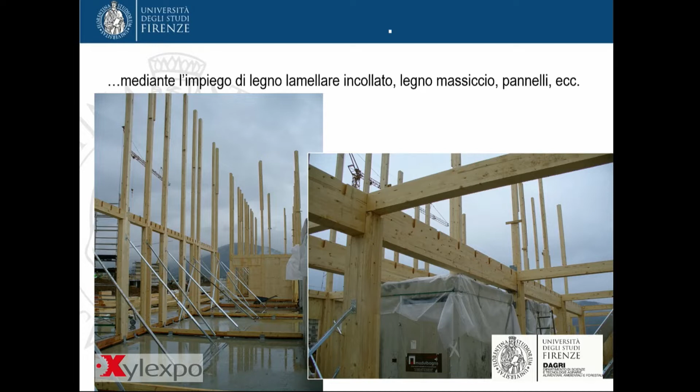The assembly of the timber elements, and this assembly is then completed with metal elements such as screws and tie rods. Then we have the timber frame buildings, which we often see depicted in American movies.

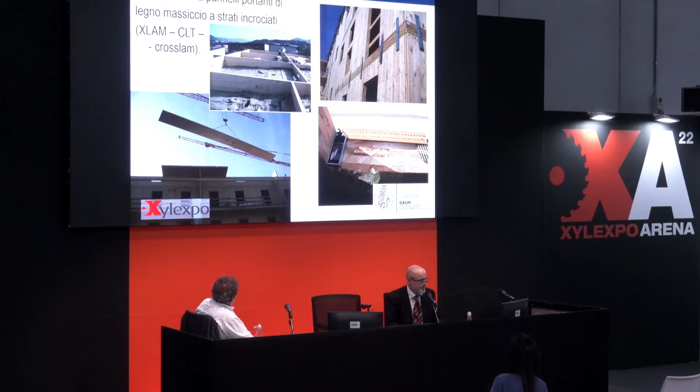Of a building. This is a post-earthquake building in L'Aquila, and there is a lot of technology behind this type of work. So

You can see pressing of the panels. They lend themselves very well to rapid assembly, fast assembly, and prefabricated buildings.

Solid wood cross-lam timber buildings are growing in numbers, and they are very important because they contribute to CO2 sequestration, which is fixated by trees, and it stays in wood until that building is demolished.

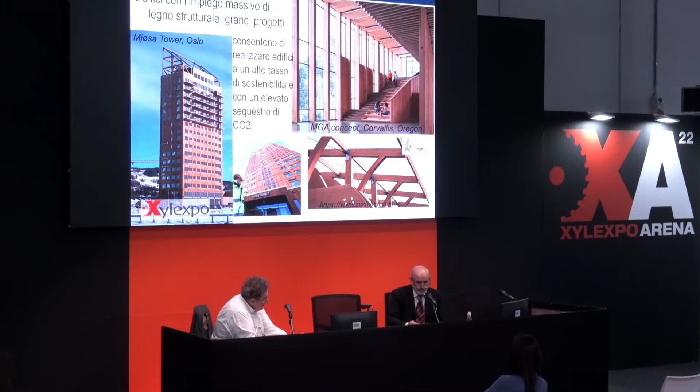And it is also important because it allows a better sustainability, especially if compared to concrete, steel, and so on and so forth. So we may discuss whether it is more or less impactful, more or less sustainable, a timber-based material versus another. But if you compare wood or timber-based elements with other construction materials, for sure timber has a higher degree of sustainability, and this is certainly a very important incentive for whoever needs to make a choice in terms of which material to use for structural use.

I may now be a little bit boring, but I'd like to hint at the technical construction rules. The latest edition in 2018 has somehow changed the approach by planners and designers to wood. The introduction of these rules allowed timber to be on the same footing as the other construction materials.

Before the publication of these rules, we had to come up with somehow different arrangements. We had to make reference to international rules or to established habits and practices. But then in 2018, the technical construction rules were released, and from that very moment, wood has acquired the same dignity as the other construction materials, and of course this also implies equal obligations as other construction materials.

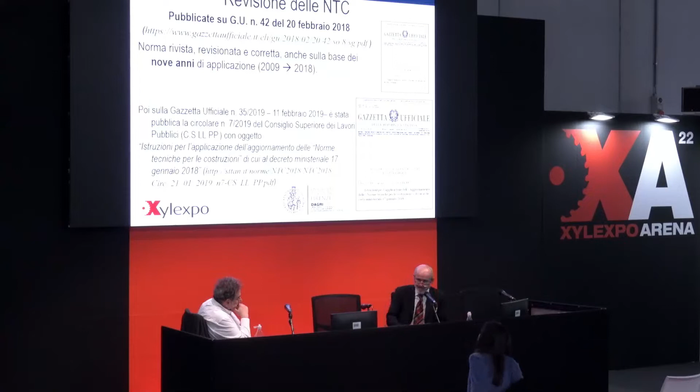released in 2008 became effective some years later, and it was then updated in 2018 when it was revised and updated. And in 2019, the guidelines on understanding the technical construction rules were also developed.

So I will not go through every single piece of the construction rules. The focus on timber is in Articles 4.4, 7.7 and 11.7.

And our focus will be specifically on 11.7, materials and wood-based products. This is the chapter that we are going to pay attention to, the 11.7, because this chapter defines the requirements

of the materials' properties, procedures to qualify materials, and this means that all the rules and regulations for construction materials are set and mandatory to be complied with, including wood, including timber.

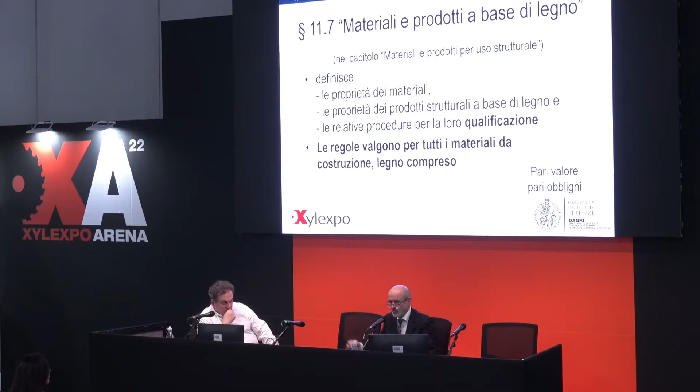And this is important because in the past everybody went their own way. There were no rules, there were no regulations, for quality materials. Everybody—different materials were qualifying as quality materials. So it's important to have this set of rules that allow us to build safely.

Chapter 11 of the technical construction rules also identifies the important professional profiles for the building process: the producer, the manufacturer, the planner, the builder, the construction site manager, site inspector, and so on and so forth. Each professional profile has its own functions described in the technical rules.

Also in terms of choosing the correct quality of the materials, be it solid wood or glued laminated wood. And of course these requirements must be verified, assessed and accepted by the construction site director. So timber and timber-based products therefore are required to go through the entire legal requirements as any other construction material.

Any product based on timber or products derived from timber, be it panels, trusses, or beams, must be uniquely identified by the manufacturer according to specific procedures. They need to be qualified by the manufacturer, meaning the manufacturer must indicate the grade and quality of the material, and its structural properties like resistance or supporting capability. These data must be specified in the building project.

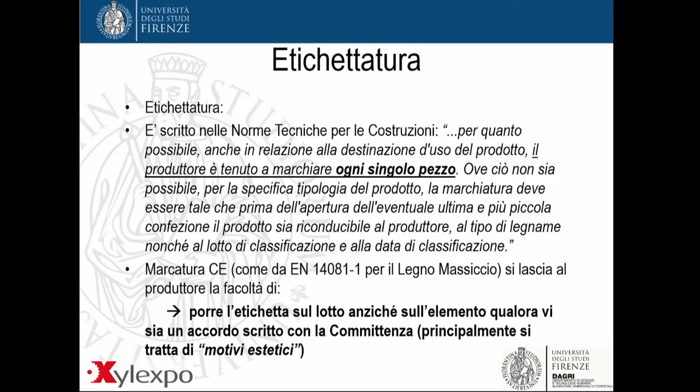Now labeling - unfortunately in Italy, in spite of the fact that technical rules provide for wood to be labeled, there are possibilities of not labeling wood elements, but instead accompanying them with a document summarizing the characteristics of the wood provided. What is an exception in Italy has actually become the rule, because oftentimes, for financial reasons, you prefer to enclose the document rather than marking and printing the individual product item. They say you spoil the beauty of the beam, but the marking is usually placed somewhere you don't actually see it. We should get used to the fact that marking is important for us, because we sleep on it.

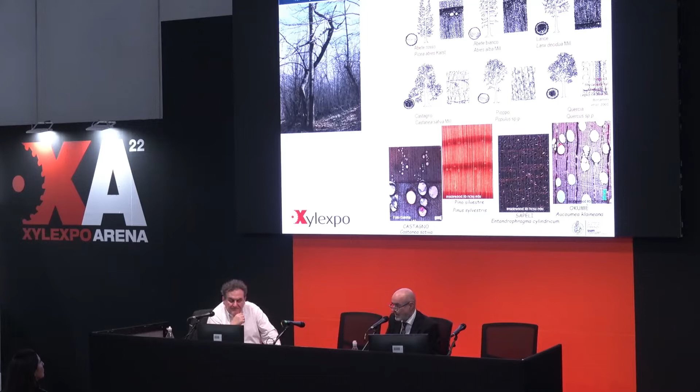This is a big difference, especially in relation to the fact that our material is growing as nature lets it grow. As you see on the left-hand side, it's two chestnut trunks that are presumably two children of the same strain - one is perfectly straight, whereas the other one is anything but straight, so it cannot be worked. We're dealing with natural raw material, grown according to the laws of nature - the environment, the weather, fire, windy areas, worms, fertile soil. This implies an enormous variability in characteristics, and if you multiply it by the great variety of wood species available, you have extreme variability of raw materials.

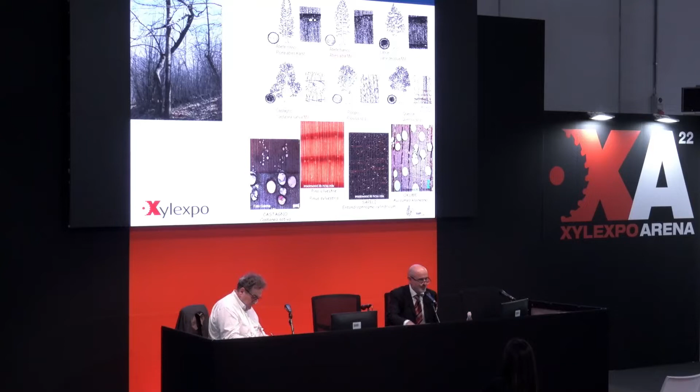If you talk about steel, I decide how much iron or carbon I want to put in it. If it's concrete, I decide the amount of sand or whatever, but it's different.

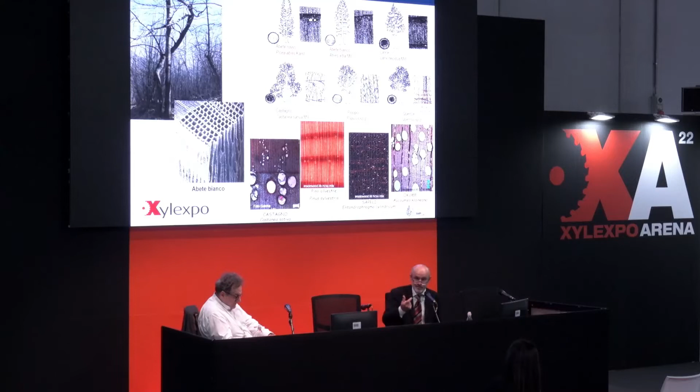Unfortunately, we used to have materials that are made—I mean, this is for concrete again. We used to have concrete and iron and say this is good, this is no good, this works well, this is broken, this is less concrete, more concrete.

Whereas nowadays we have a different situation where our structural material is made of wooden elements, and in a rack like this you won't find two pieces of sawn timber that look exactly like another, because of the rings, how it was sawed, the defects, the knots. So then a house designer will tell you, well, I can't do this.

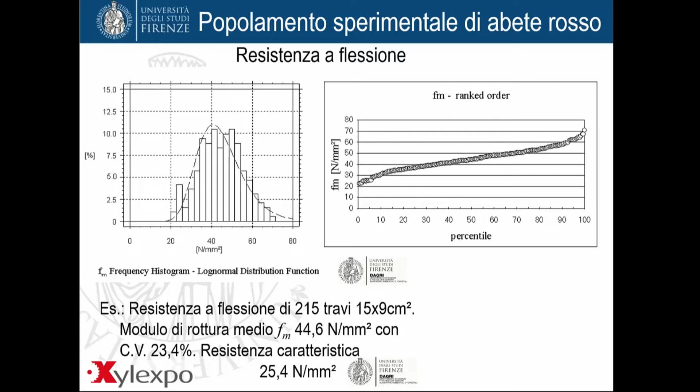How can I use different pieces? How can I be assured that two different beams hold the same? I'll tell you how. In order to solve this problem of natural variability of wood, Europe has defined a principle that allows us to reduce this natural variability and make it contingent.

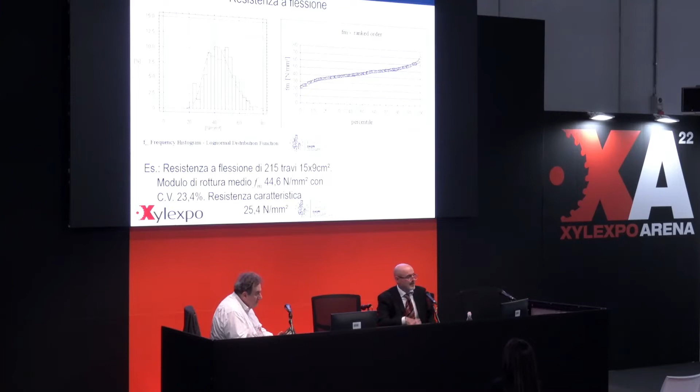So to really reduce it significantly, reducing exactly the possibility of having different values for our material. You see here two charts, real beams, spruce from Val di Fiemme in northern Italy, 215 beams, and you have the values here.

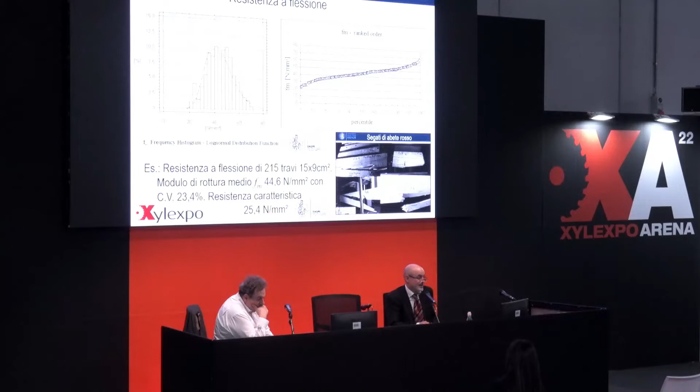So our goal is to reduce this variability, to select timber in a homogeneous group. It was, again, 215 beams, and each piece of timber broke in its own peculiar way.

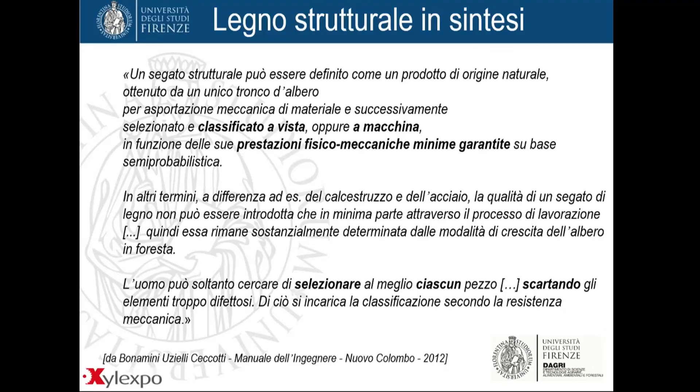And if we transform sawn timber, any kind of sawn timber, into a structural product, we have to go through selection. We cannot produce solid wood ourselves—it's made by nature, we can only saw it from the tree. Once it's sawn, we can select it on the basis of its strength characteristics, and these strength properties are the ones that affect the resistance and strength of the beam once it's in place.

Again, visual—that's where we talk about visual or machine grading. We get the sawn timber, it is classified. Each piece is graded, and some pieces are actually discarded.

This is a totally new way of working. In the past, they would sell you timber in bulk, whereas now manufacturers have to grade sawn timber one piece at a time and discard the ones that don't comply with minimum requirements.

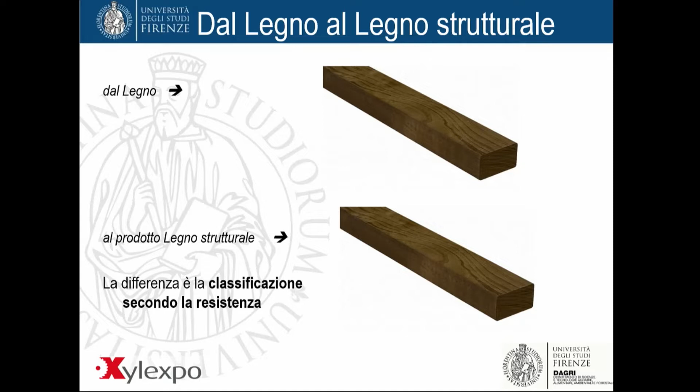Now, solid wood—switching from sawn timber to structural wood, nothing changes in terms of the product. The one above is any type of timber. The one below has been selected to be structural wood. This applies also to laminated wood, and it applies to cross-laminated timber. So each board has to be graded, otherwise it's not structural timber or wood.

So this was the introduction. Now I'm going to briefly summarize, give you an idea of how the principle works. So we're going to talk about visual strength grading.

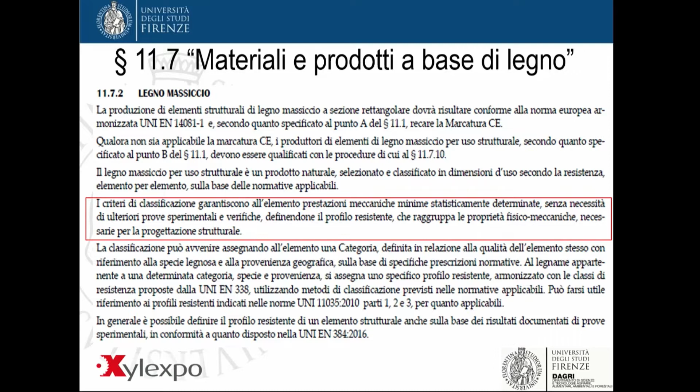Here too, many designers were a bit skeptical about this, telling me, you give me parameters, recommendations, but who actually knows wood? And knows wood since it was a tree, and so knows the characteristics, properties, defects of a tree that actually become the properties of wood—especially the ones that impact its strength.

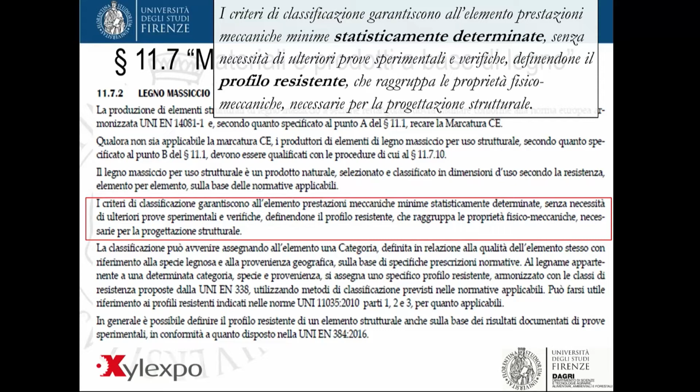The rules say that grading criteria ensure minimal mechanical performances that are statistically determined. So we basically establish characteristics that are statistically determined so that we know the risk of using one value or another, one grade or another, without the need for additional testing.

We define the resistance profile, or strength profile, the set of mechanical properties of that wood. If I get C24 class grade wood, I know its tendency toward stiffness, strength, flexibility, bending—all of the typical characteristics that structural wood must have.

And a category, so a grade, is assigned to wood that defines its quality, but it's not quality that we decide subjectively. It's certified quality with reference to the wood species and with reference to the geographic location. And what does geographical location have to do with this? It's just spruce, but I can tell you that spruce growing on the Alps, looking onto the Po Valley, at low altitude versus high altitude, is different.

Spruce growing in Germany does have different characteristics than spruce growing in Italy, so geographic location does have an impact. Wood belonging to a specific category is assigned a specific resistance profile, and the designer, the architect, defines the strength properties of wood that he wants to have. So if the designer specifies C30, I must give him wood that is C30 graded.

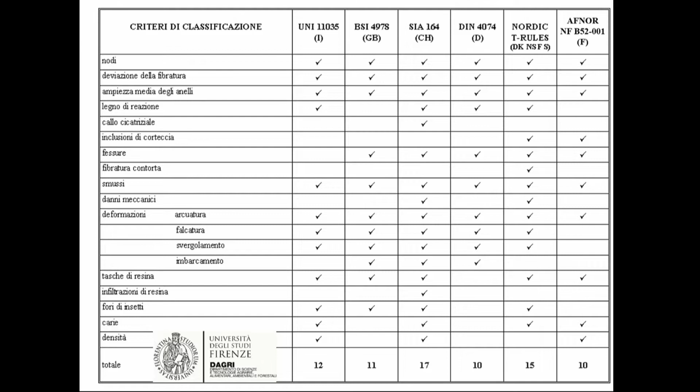This is an example of different visual strength grading systems: Italian, Swiss, German, Scandinavian, each with a number of established criteria. Some criteria are law requirements under European regulations, the harmonized regulation by the EU that establishes the minimum requirements to ensure wood strength.

The measuring of knots is done differently in the UK than elsewhere. There's the knot area ratio, and in Germany we have the minimum knot diameter. Everybody has got their own criteria, but the minimum criteria are assured and guaranteed by the European standard. There are countries that have been grading for 100 years, and we Europeans could not go to them and say now you're going to use the EU regulations. So everybody actually developed their own national rules.

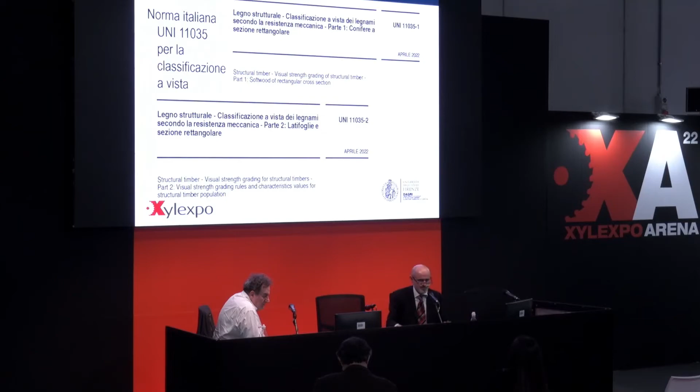In Italy we have UNI 11035, which was released with updates just recently. It covers visual strength grading of timber, part 1 for softwood and part 2 for hardwood. This is a very compact release, so we have everything in one single standard.

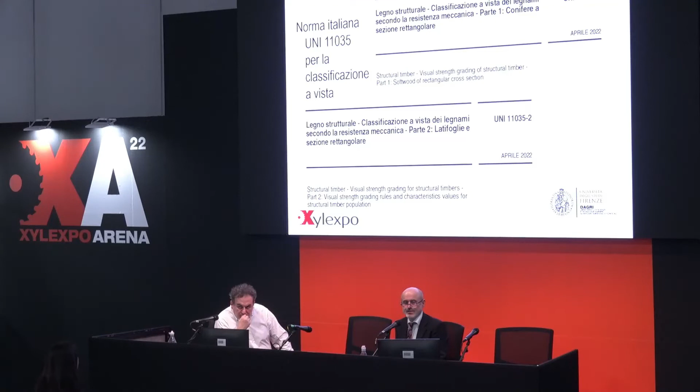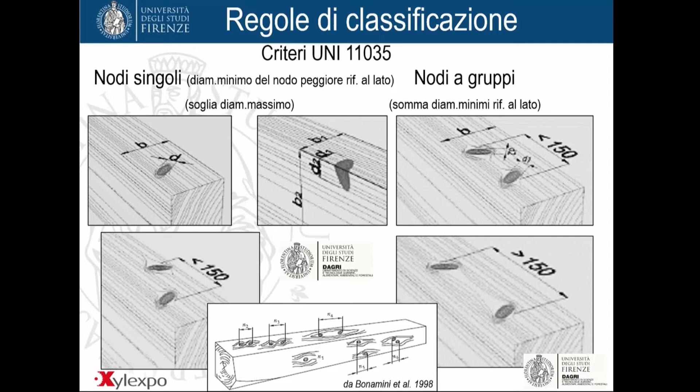Just a few examples, we won't go into all the details. The Italian UNI standard is somehow aligned to the German standard. It's not really like Germany, but in the 80s and 90s a number of tests were made on Italian wood, comparing different national laws. We didn't have the EU regulation yet, so we compared the rules from Germany, Scandinavia, Switzerland, and the UK, and the German standardization system was the one that allowed us to obtain the best result with the least effort. So the Italian standard was similar to the German one, and here you have individual knots and clusters of knots, which are assessed and measured if they are of a certain size to make sure they comply with the standard.

An expert grader doesn't need to know if a knot is 25 or 27 millimeters. He just needs to know if it is below 20 or between 30 and 40. So you don't go there with a ruler to actually measure, it's just visual. You measure only where you have concerns, for instance, if a knot is around 0.4 or 0.6, to know whether it belongs to one class grade or another.

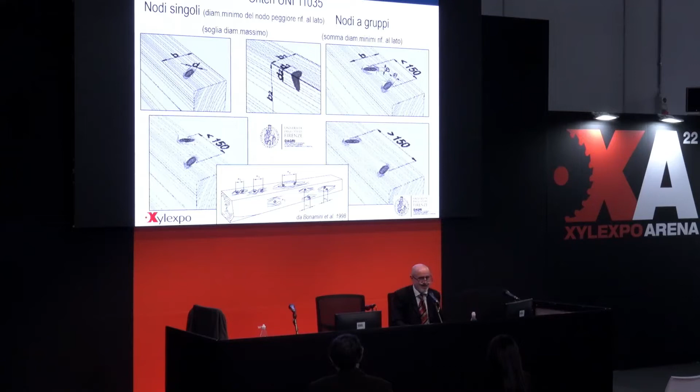Because knots don't have a value in themselves, but they do have a value in reference to the zone of timber where they are located. So if I have a 2 centimeter knot on a 30 by 30 beam, it is one thing, whereas a 2 centimeter knot on a different sized beam is another. So knots are the first criterion considered when doing visual strength grading.

Then there are additional parameters, like the slope of the grain, those vertical tubes. If you're lucky, they're quite straight; otherwise they're a bit sloped on the edge of the timber zone. The width of the rings also has to be measured, especially for certain species, because if wood grows slower, it's thicker, like a pine grown in Sweden compared to a pine grown in central Italy. So the width of the rings is an important parameter, and it does have an impact on the density of wood.

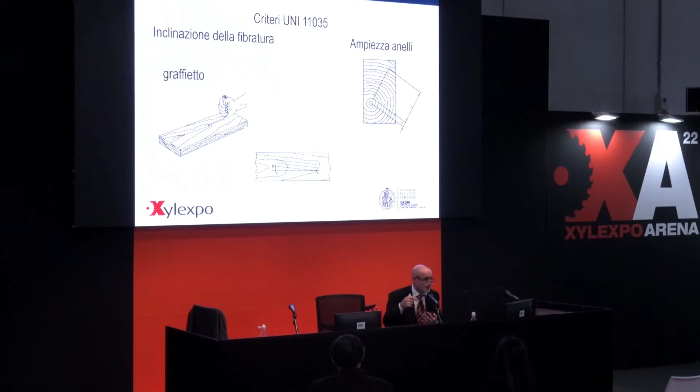Density of wood is important in mechanical connections, screws, pins, bolts and nuts, everything that is metal, since metal is much more rigid than wood and interacts with it. So we need to measure density to know how it will resist.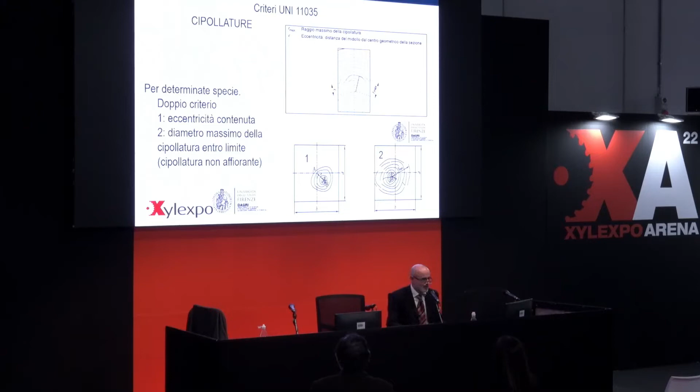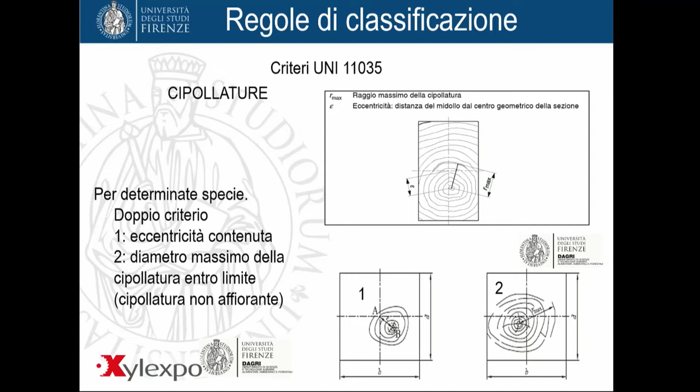Then there are some defects to consider, because chestnut, for instance, is a typical Italian wood which does have a typical defect called ring shake. But in our standard we do allow for ring shake, because we do love chestnut in this country.

Visual grading with the Italian standard 11035 applies to seven species grown in Italy: softwood species are fir, spruce, Douglas fir and larch, and hardwood species are chestnut and beech. Beech is new, as it was introduced in the release of April 2022.

So these are the wood species grown in Italy that can be graded and marketed for structural use in the construction industry.

So how is the grading standard? This is for fir, spruce, Corsican pine and larch. There are characteristics having an impact on strength: knots, rings, grain, fissures.

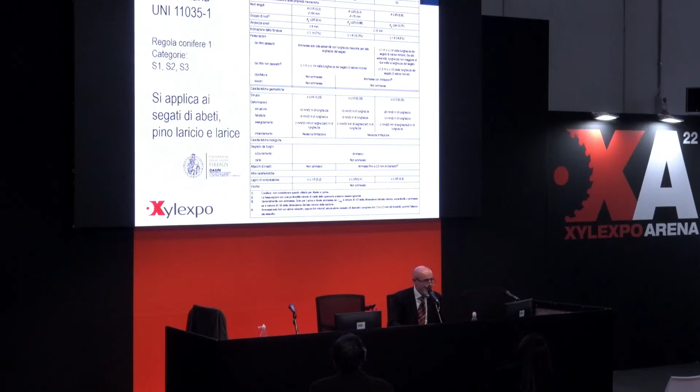So in Italy, fir S1 is class C30. Designers use grading class C30, 300 kilograms per square centimeter. And it's not the average value, this is the minimum value.

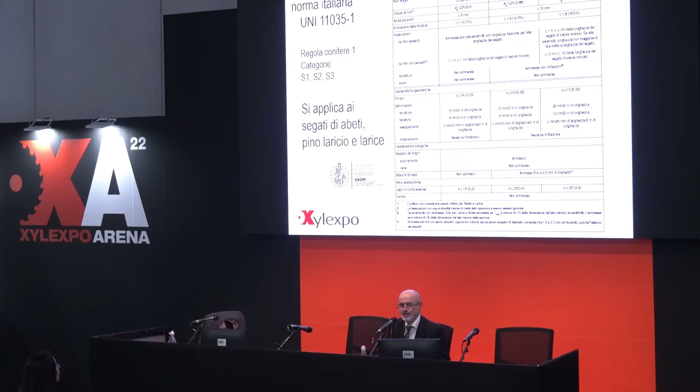S2 is C24, 240 kilograms per square centimeter. S3 is grade C18, so 180 kilograms per square centimeter. So designers can choose among these three grade strength classes.

And then we have softwood 2, we have Douglas fir, which is an American wood, Northern American wood, that is actually grown in our mountains too. It does have beautiful strength properties, and it maintains high performance, high density.

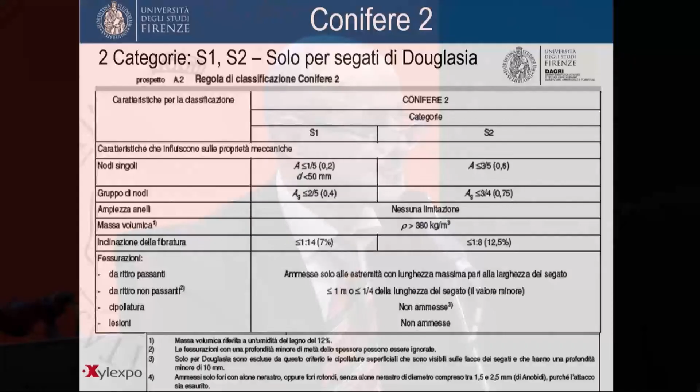So we dedicated a standard specifically to Douglas fir, with S1 and S2 grades. Now we move on to hardwood.

The standard is changing, and shortly there's going to be the European standard EN 1912 that associates categories to strength classes, species to strength classes.

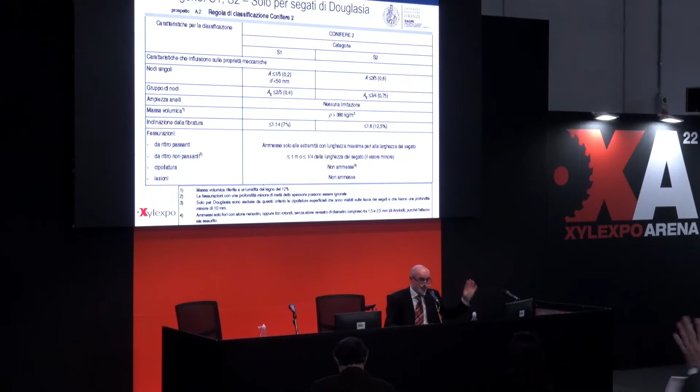So the next standard, 1912, we'll have two possibilities with Douglas fir. If I grade it into S1 and S2, I will have C30 and C22 respectively. If I put them all together, so just S2 and better, it's all C24.

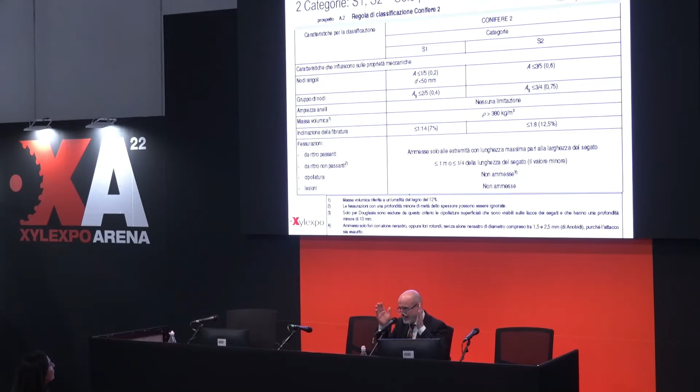So it depends on how the manufacturing plant is set up. If they want to have C24, it's just S2. If they want to do more, they can differentiate, but they cannot have C24.

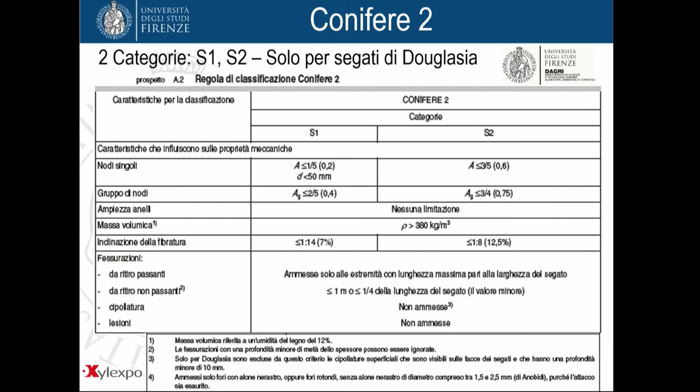The procedure by which we assign value to structural wood properties is different. So if I establish threshold values for S2, I'm able to obtain better gradings, so I end up in C24.

But if I do have S2 and S1, part of the better material doesn't help contribute to S2. If I split into two categories, S2 is C22 and S1 goes into C30 - that's 220 kilograms per square centimeter.

That's C22. The characteristic value is the minimum strength value, threshold. Then we may have sawn timber that supports much more than that value, but that's the minimum requirement for the planner. So if you take Douglas fir, it not only bears 220 kilograms per square centimeter, even more.

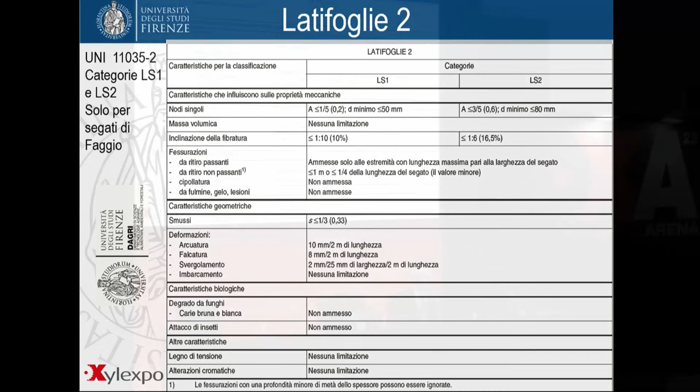Let's finish with chestnut, which only has one category, one class, LS. It ends up in D24, 240 kilograms per square centimeter, and then we have the new rules for beech timber.

Beech timber doesn't have a market yet. It has only two categories, LS1 and LS2. We are ready for future developments - we will have other timber species, other wood species, and we will try to implement the number of species to be used for structural use.

So LS1 and LS2 is what we have now available for beech. I can't remember them well by heart, but I think LS2 is 30 and LS1 is 35. Beech wood is much more resistant, stronger, but it's also more dense.

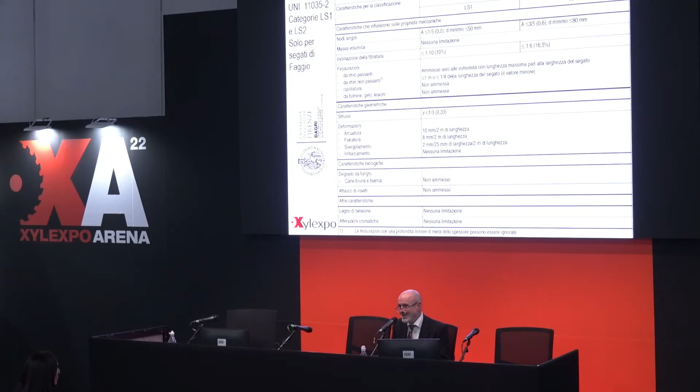So the density of chestnut is 580, spruce 420. The more wood you put, so more walls and less empty spaces, it bears more weight. But again, I don't remember all these classes by heart - I need to double check these values.

There is a question from the audience which we cannot translate because we didn't hear it.

Oak timber is not yet available in Italy. There is no visual strength grading rule in Italy, so whoever buys oak wood buys it from the international market, not in Italy.

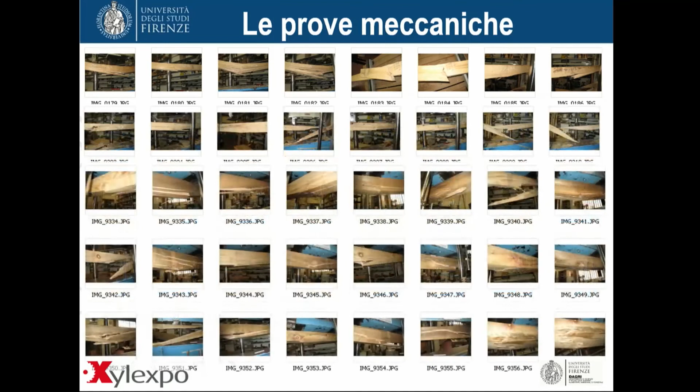In order to give you an idea, in order to determine values, we need to break some thousands of samples because we need to work on large numbers. The value thresholds need to be determined statistically.

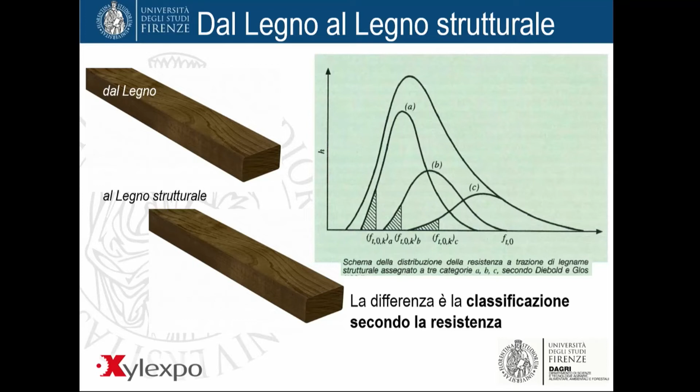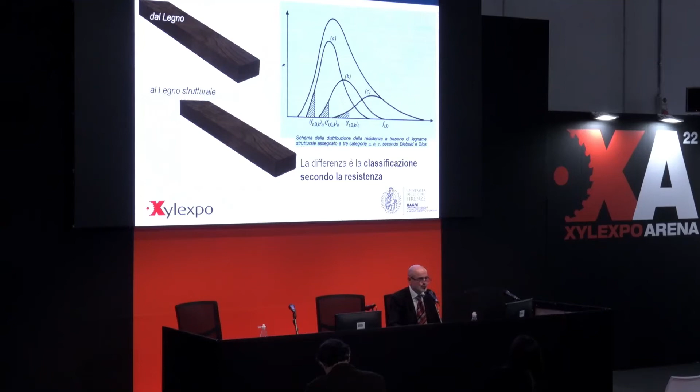So going from timber to structural timber, the difference is the grading and the fact that we need to discard some materials. In the graph, the big curve has no piece in the lower part - that's the material that was discarded, that could not be classified as structural use. This is something we need to bear in mind.

So there is a certain percentage of material that must be discarded. I only have 9 minutes left, and I will focus the rest of my report on machine strength grading, which is the innovation, and it is the reason why I'm here.

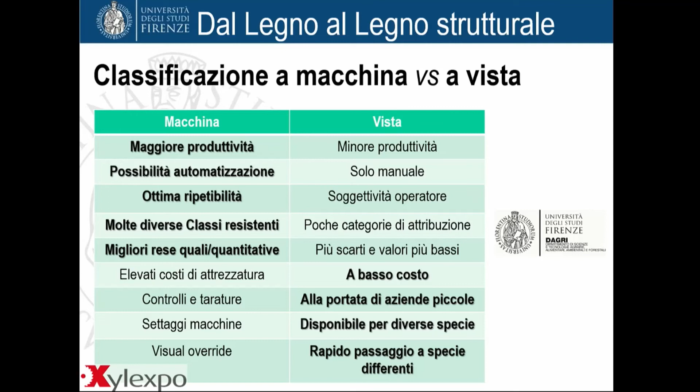The bold character indicates advantages, benefits - more productivity, hundreds of pieces per minute can be graded. There is a possibility for automation, and excellent repeatability. Two grading processes on the same sawn timber piece allow me to end up with the same strength class, several diverse strength classes, and also better yields from a quality and quantitative point of view.

On the other hand, visual strength grading costs much less. It is within the reach of small companies, and in Italy we are faced with a market characterized by small and medium enterprises which cannot afford a 300,000 euro machine.

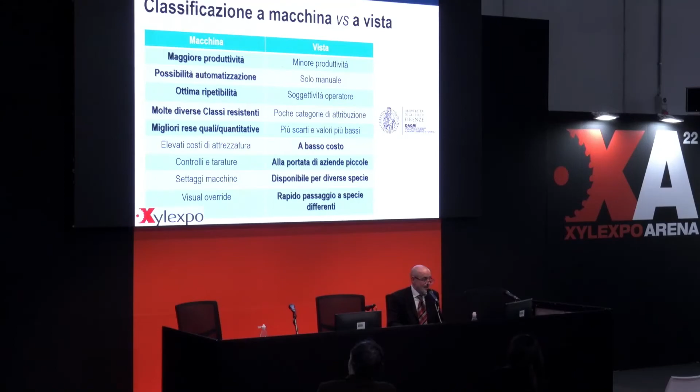It is available for different wood species, and it's easy to switch from one wood species to another - so now we have a fir, and that's now switched to birch. It's more versatile. But on the other hand, there are some cons: it produces much less in terms of quantity, and it's operator dependent, so the grader grades in a better or worse way - less predictability.

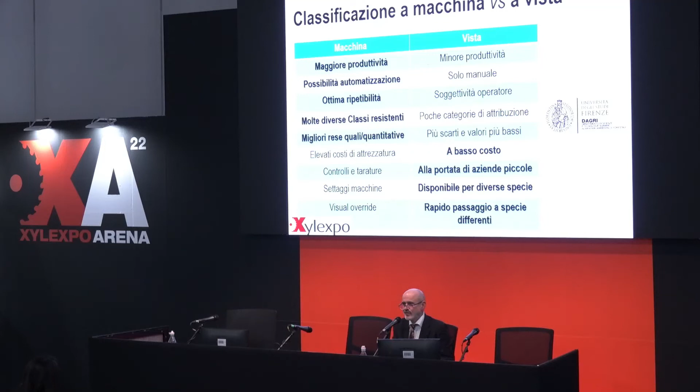For categories, for classes, chestnut has only one category, all the rest needs to be discarded. We tried to establish two classes, but values did not allow us for two classes - the values were too similar. The lowest class and the highest class were pretty much similar, so it made no sense to distinguish these hardwood species into two classes.

We only have one. So what are the grounding principles for machine strength grading? It's based on non-destructive methods - basically a selection of parameters are measured. These parameters are related to stiffness and resistance. These machines measure different parameters, they're put together, and based on a statistical collection of data, we then grade the various sawn timber.

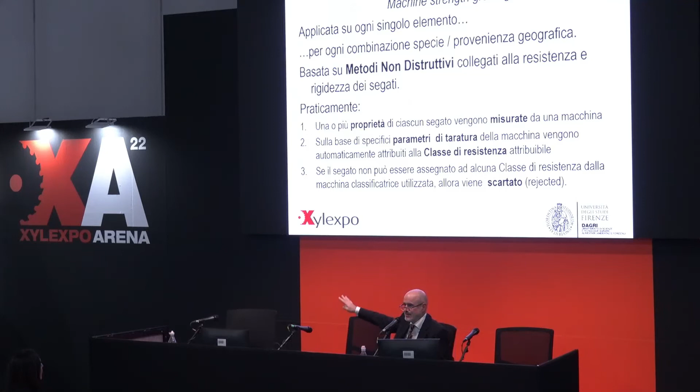If they're not good, there will be a pile of discarded timber, which will be sent to carpentry for other uses. But it must be a separated, segregated pile of wood, not to be used for structural purposes.

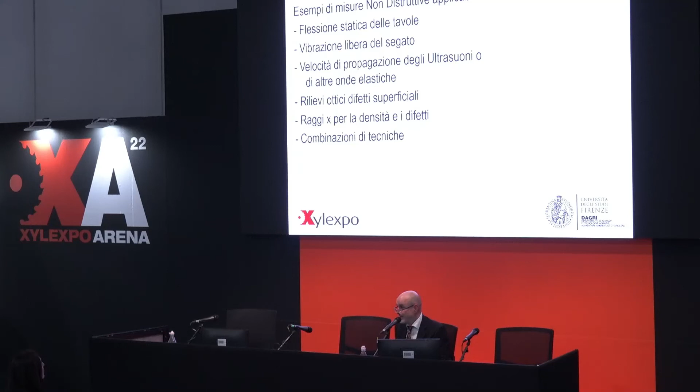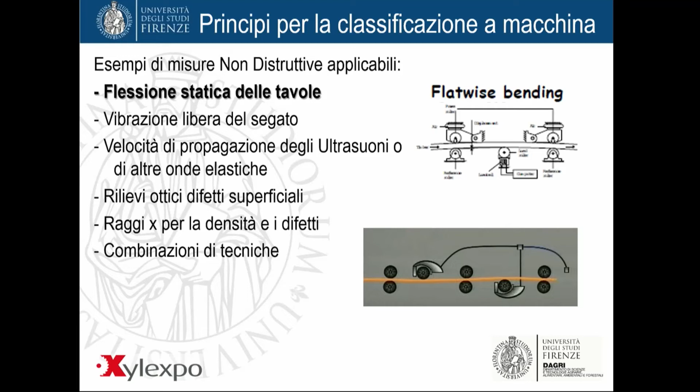Let's now look at some of the principles that we use for wood board grading. There is a system that we took from the Nordic countries, and it started from the bending principle - we take a wood board, we bend it on the flat surface, and we see how stiff it is. The stiffer, the more resistant to cut it is.

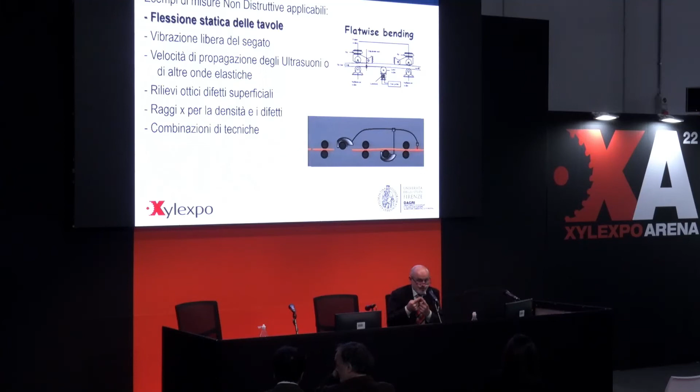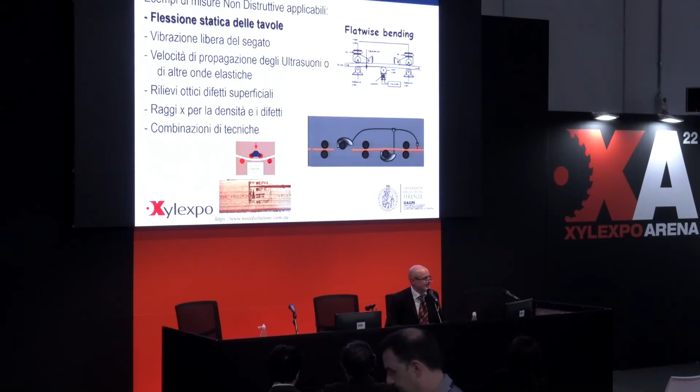The board goes into this machine where it is flatwise bent, and based on the point where it is most bent, that's how I would grade and classify my board. And I will print the abbreviation, the acronym of the class there.

This is one system. Nowadays, there are new methods that are much more versatile, faster - dynamic systems. These dynamic systems are based on the free vibration of the sawn timber.

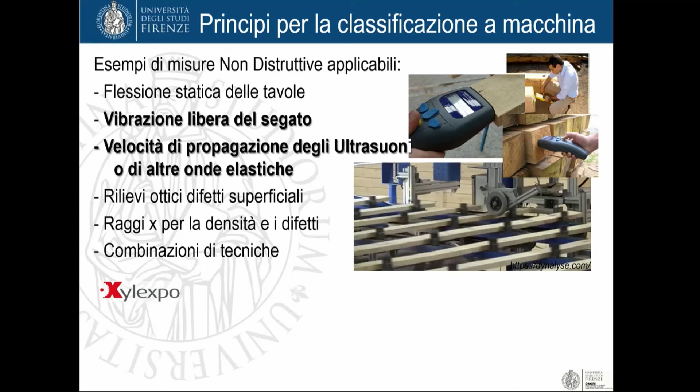You can see this small machine, MTG timber grade - we have it in our university department. You can use it on small lots of production, from 120 boards per minute, so one board every half a second. It's faster, suitable for production lines.

There are also some other manual grading systems, ultrasound based, some other devices used in laboratories, and pressure waves. The principle is you need to get a board to vibrate, and based on the density and the frequency of vibration, which basically means sound, the board will be more or less stiff than another. Based on the stiffness, you can then establish the connection to strength or resistance.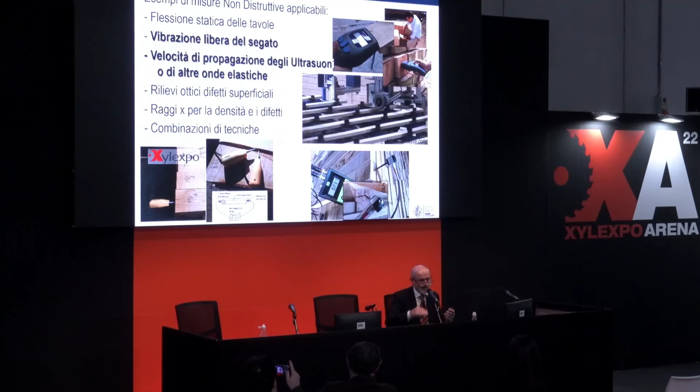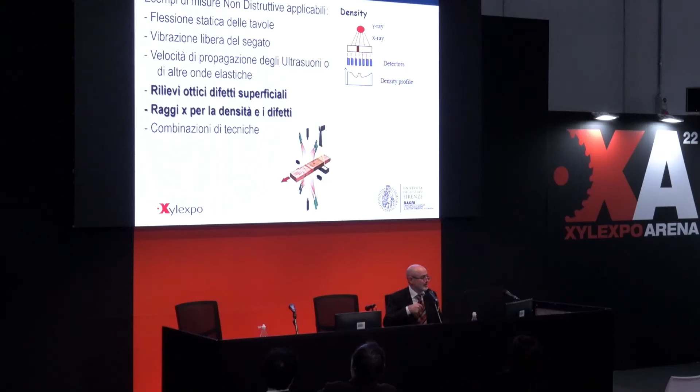And based on the sound, you can grade it into a class. There are also much more performing methodologies, combining X-rays, optical inspections. X-rays, a very, very complicated methodology.

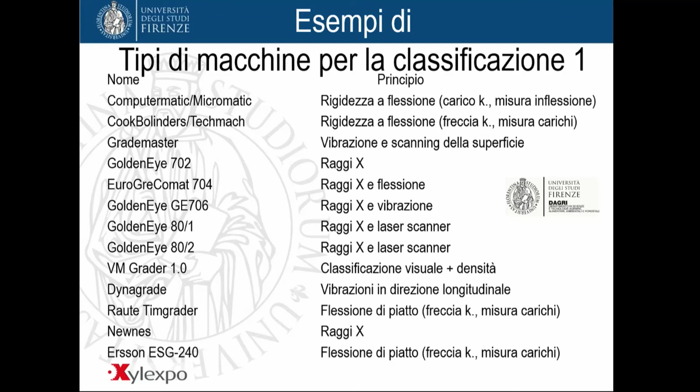We also are lucky enough to have a Microtec in Italy, a company in the province of Bolzano, northeast Italy, that sells worldwide, and it has very accurate, reliable, dependable, and valuable classifications. Here are some of the grading machines - this is a list of strength grading machines: CookBolinders, Techmach, Grademaster, Golden Eye, EuroGreComat, Golden Eye, VM Grader, Dynagrade, Raute Timgrader.

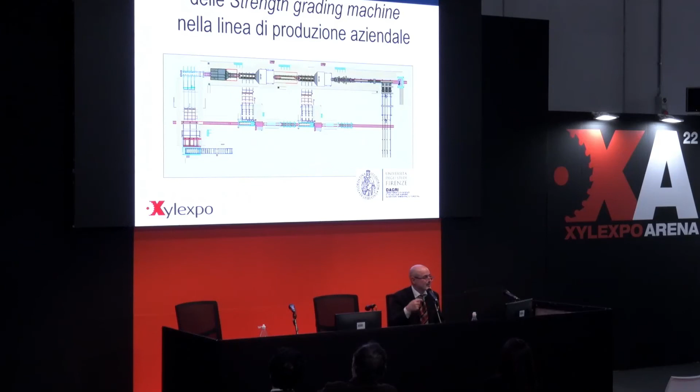There are many machines, but on the Italian market this type of process has not taken root already. So many companies haven't digested yet the process. But it would be very logical to have a production line of sawn timber and have a grading machine attached to it and sell my sawn timber for structural use.

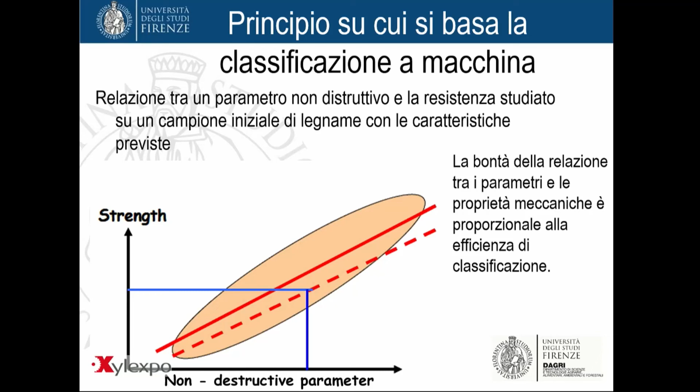This is the principle: I will take the non-destructive parameter on the horizontal axis, and correlate it to the strength of the material. Based on how good this relationship is, I can then establish the threshold value which drives the grading of the sawn timber. If all the values are close to the median line, my correlation will be very good.

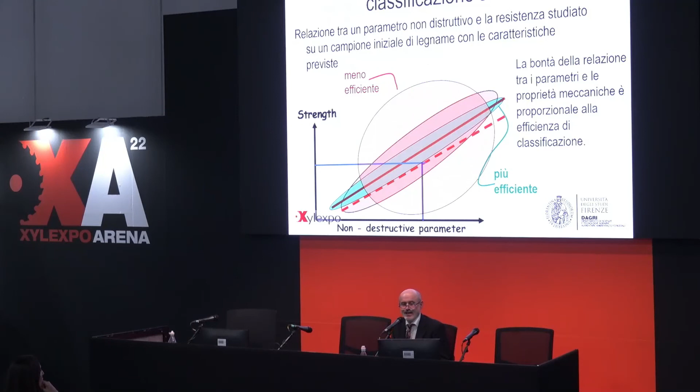So I will calibrate the machine below that value, so that my sawn timber is graded for structural use. If the distribution of values is less efficient and takes the shape of a cloud, like in this case, then my machine's parameters will have to be calibrated to a lower extent in order to be sure. First thing is safety - this is the basic principle.

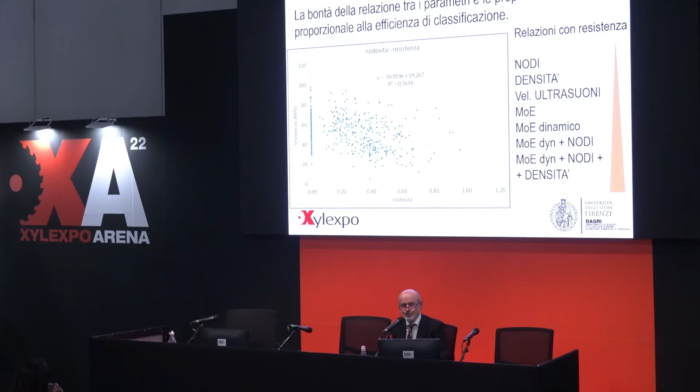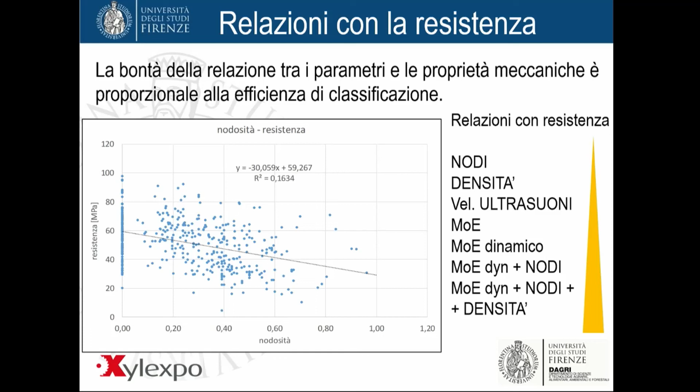I will not comment on all the data. Here what you see is knots, either measured with machines or by visual grading. The relation with the strength can also be obtained by a combination of parameters: a dynamic value with the number of knots, or density with the number of knots.

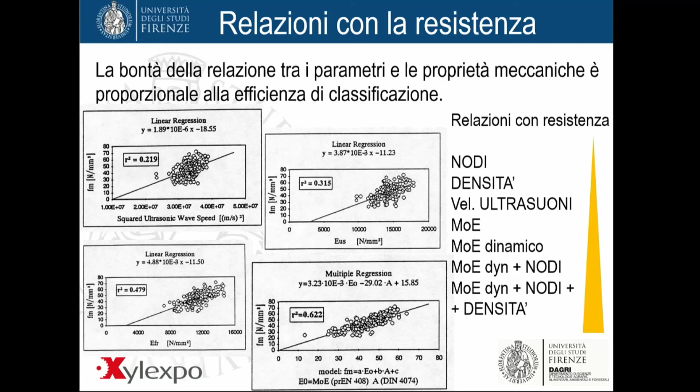By doing so, you can improve your grading results. So the more scattered or closer the clouds are, well, that depends on how you combine different thresholds. These are values attached to the sawn timber that I broke myself in that Trento Carpenter's workshop. At the bottom on the right, you can see more compressed values - we combined more parameters, knots, vibration, and density, and this improves greatly the ability of the machine to grade properly, and therefore the possibility to obtain fairly good strength classes.

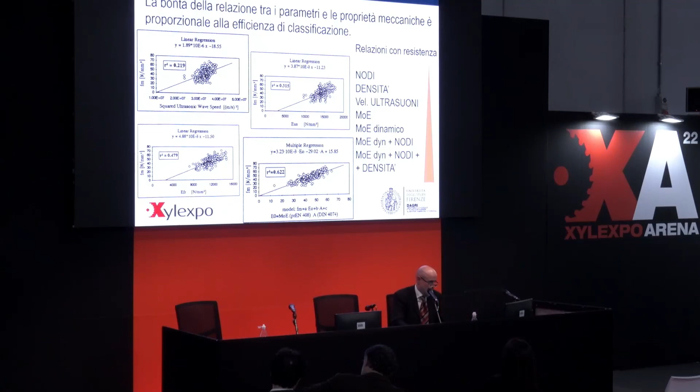This is experimental data - I will not reveal when I did this many years ago, but this is the principle underlying the whole process. Of course, today's machines are based on today's actual numbers, but these were experimental data. I had them available to show you, and let's see how they interact with the machine grading process.

The combination of values on the left are alternative scenarios. So you can obtain C40, C30, C18, which you cannot obtain with the visual grading process. Or if you want to maximize, you can get all to C24. Based on my choice on how to set up the grading machine and based on the tests, I can then obtain different combinations that are more or less suitable to my purpose. Maybe I want a niche product, a C40, that a certain client may require at a certain given time, and I have this possibility.

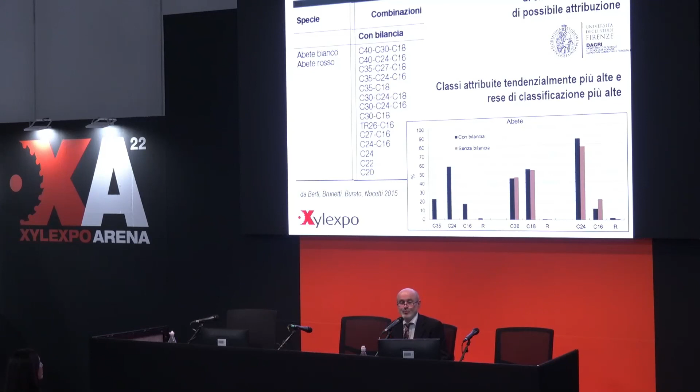So the grading yield is much better with the machine, and of course the grading classes are much higher. In this exercise of mine, I showed how the different classifications could differ from 70% to 75%. That was a very small, experimental batch. This same principle should be implemented and applied to modern systems, to modern machines.

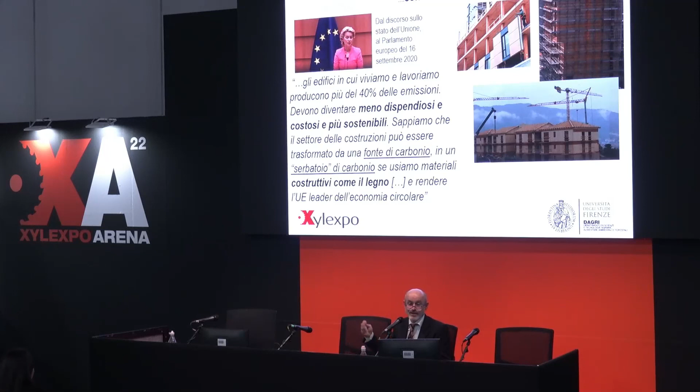And my very last slide. So the timber construction industry continues to grow, not only because Europe asks us to do so. This is an excerpt from a speech delivered in September 2020, prior to the war, so we still thought differently. But the wood construction industry will not save the world, but can certainly greatly contribute to reducing the greenhouse effect. And so we need to convert our production systems towards that direction.

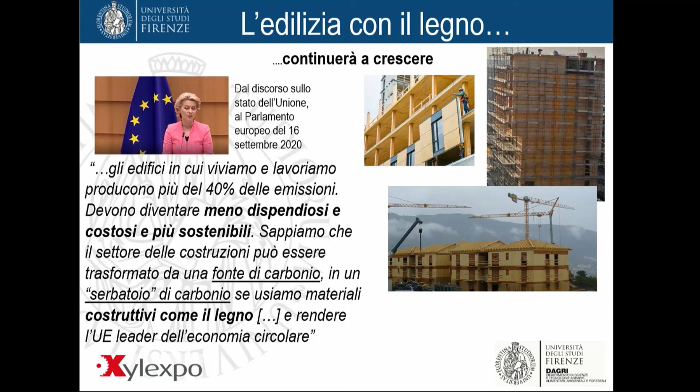Timber-based buildings are less demanding in the face of production, and they can also be more sustainable compared to buildings made with other materials, especially if we look at massive buildings. Here we have glulam buildings or X-lam buildings - these are solid reservoirs of CO2, basically. So until the very moment you demolish that building - and it must last at least 50 years, or even 100 or 200, until the decision is made to demolish it - until then, that CO2 amount is tied up in there. And this is the major difference between timber and other construction materials.

Let me now close my contribution. I know I extended a little bit my available time. If you have any questions, I am open to take them whenever you like, individually or jointly or together. Thank you.